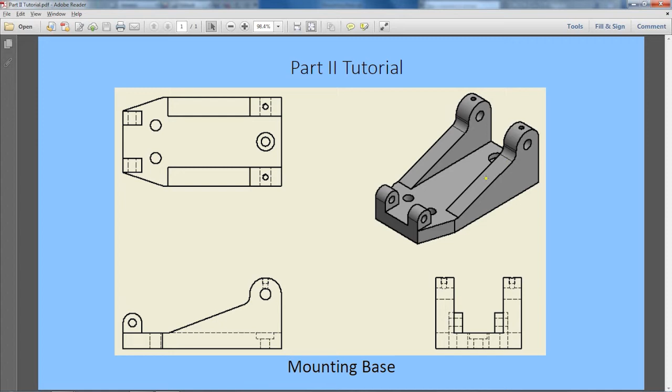Okay? So let's go ahead and go to your left side, right? And then right click and start a new sketch. And if you did this correctly, you'll see we're in a two-dimensional sketch, and your part should be sitting in this quadrant over here. It's above the x-axis and to the right of the y-axis.

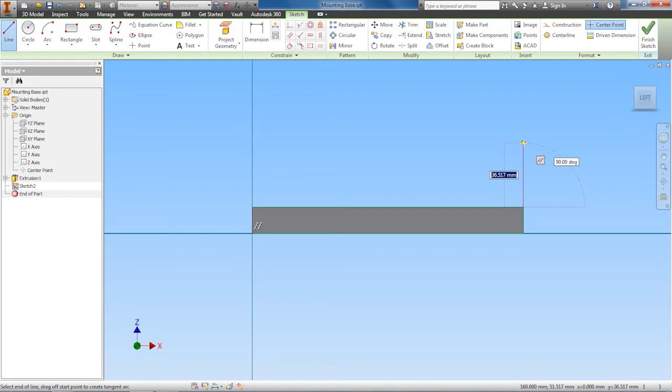Okay, so now let's go ahead and grab this line feature. We'll start here, and make sure you start at the corner, the top edge here, and then go up. We'll go like 40 or so. Just left click here, and then let's get out of this feature. Right click and click OK.

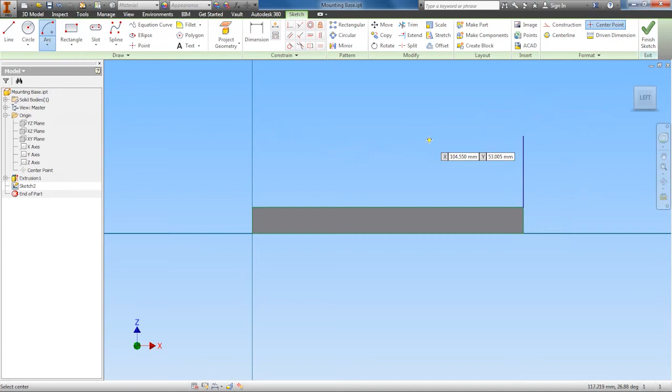And now we're going to use the arc feature. We haven't used this yet. If we hit the drop down, you see there's 3 different ways you can draw an arc, and the one we want to use here is the center point. When you're drawing an arc using the center point feature, the first thing you want to establish is where the center of your arc is. We want the center of our arc to be aligned with the top of this line that we already drew. You'll know that it's aligned when you see those purple dots right there. So that means it's level. So go ahead and left click.

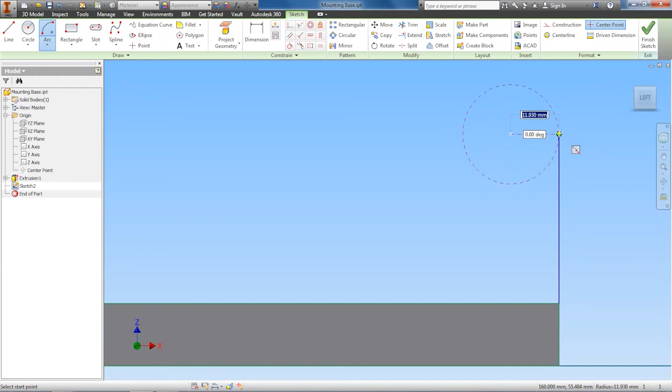Now we want to designate where our arc is going to start. So we want to go over to the top of our line, and you'll know that you're at the top because the dot turns green. So left click here, and now you can start your arc, and you can see that the bigger your arc, the degrees go up. So halfway around is 180 degrees. We'll just go halfway around at 180 degrees. Left click again. So now you have an arc. So right click, get out of this.

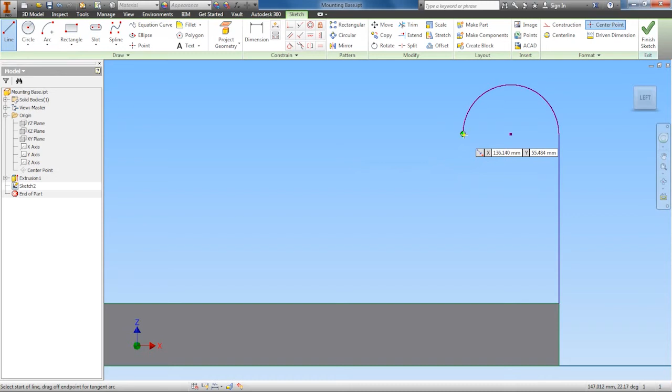All right, grab the line feature again. We're going to start at the edge of our arc that we drew, and you can always tell when you're at the edge because it kind of snaps to it, and then the cursor turns green. Left click, it'll come down, let's go around 5 or so. We're going to dimension this in a second. So left click, and then you're still in the line feature.

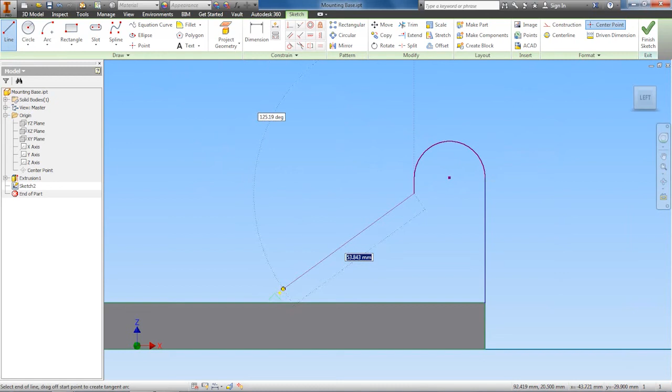So now we're going to start going at an angle. You don't need to be specific at this point, but we're going to go down till we touch the edge here, and you can tell that we touched the edge because of the color of the line. Right now it's green, and as I touch the edge it changes. It's no longer green now. So let's left click, and then let's get out of the drawing feature. Boom. And so now we need to add some dimensions to this.

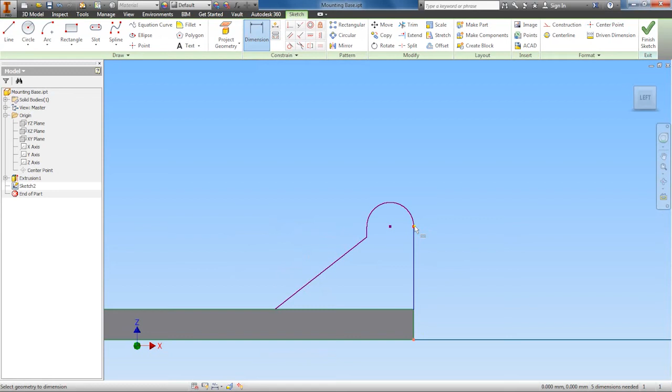So let's go to dimension, and I'm going to dimension this starting at the bottom. Let's go all the way down to this bottom corner of our part here, and notice that there's a red dot. So left click, and I'm going to go to the top of this first line that I drew, where this red dot is here. Left click again, pull off to the right. So now I can dimension this, right? And then I'll left click to type in 53.

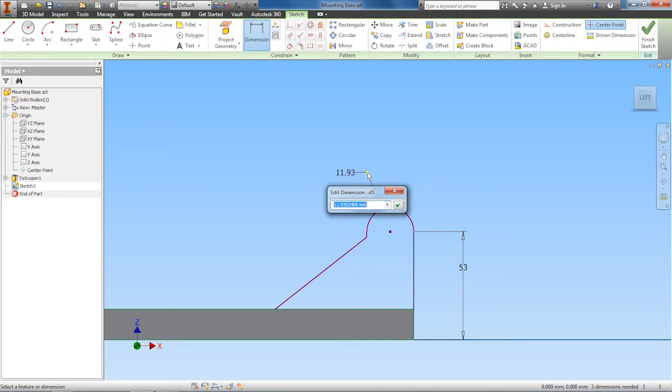All right, so we're still in our dimension feature. When you dimension the arc, you can dimension the radius of the arc. Remember, radius is the distance from the center to the edge. So just left click on the edge of the arc. See that it's highlighted red here, left click. And you can see that we can dimension this arc here, right? So left click again, and we want this to be 16.

All right. And then let's go over to the straight piece we had in here. Here it goes. Left click here. Mine is really small, so here's the piece that we need. And then left click, and this is going to be 8 millimeters.

And now we're going to add a dimension, the angle. We want to dimension the distance between this line here and this edge here, and that's an angle, not a straight line. So in order to do that, just left click on the line, and then as you scroll down toward the bottom, as you get close to this edge, you see when the icon turns into a little angle, that's when it's going to dimension as an angle. So left click. So now it's dimensioning this space here, and this we want to be 20.

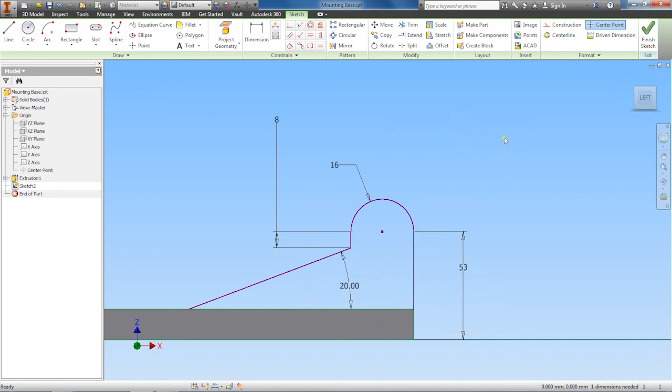And I think that's about it for this one. We'll go ahead and get out of this dimension feature. We'll finish the sketch, and let's see what we got here. All right, that's what we got. And then in the next video, we'll continue on and we'll extrude this, and then we'll draw the opposite side as well.